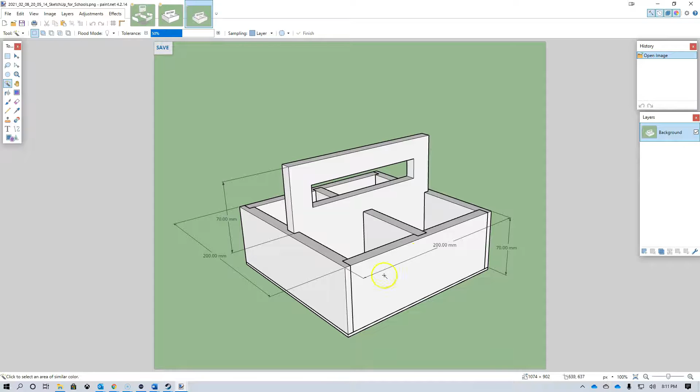So we'll be designing 5 unique pieces, but there's obviously 7 pieces that actually make up the box itself when it's made. Some of the design options you'll have, apart from colours and so forth, is possibly changing the handle shape and even design and materials.

You might decide not to have a simple crossover. So if we go back to the first picture, you might decide to cut this off, for example, and have some other form of handle. You might decide to rearrange the way these cross instead of being exactly in the middle. You might decide to put plates or other things on here that then hold things like cutlery in position, and a whole lot of other things.

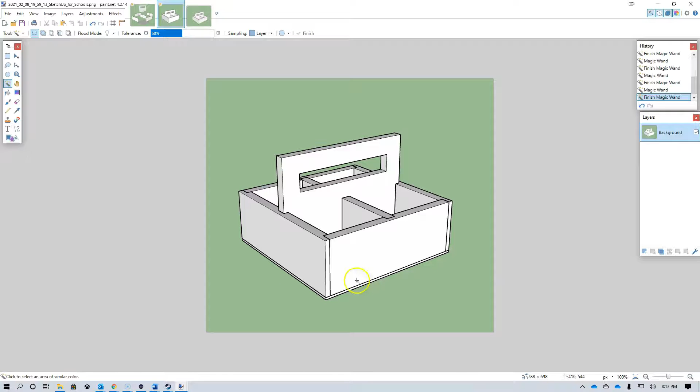But this is the base design that we're all going to work with from the beginning, and then you'll be able to customize from there. So let's have a look at how we actually go about doing this.

So we're going to come in to SketchUp. The first thing when you start a new SketchUp is to make sure that we're working in millimeters. I'm coming over here to the model info, also the inspector in general, making sure I am working in millimeters. Quite often when you first begin, you might be in inches or even feet, so make sure you're working in millimeters.

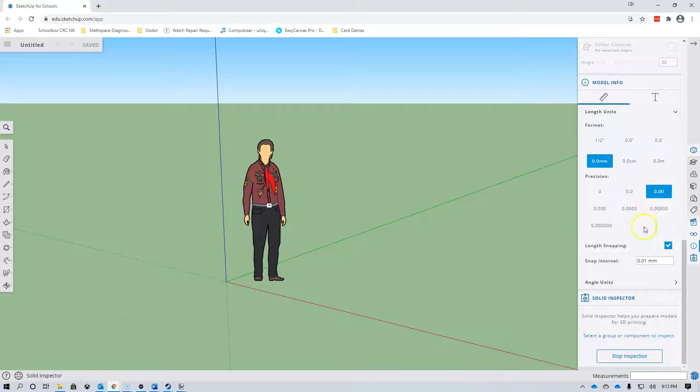Precision and so forth don't matter, you can just go to defaults, but definitely make sure we work in millimeters. And of course we can close that down. I tend to also get rid of the little person - we don't need them, we're not going to be designing something of that size.

So the way I would normally go about designing this - there's a few different ways. You could start with a full top-down view and then pull everything into the size it should be, but I like to start with designing the pieces one by one. So I'm going to start with probably the most complex piece, which is the one with the rebate and housing joints on them, and I'm going to start by drawing myself a rectangle.

I don't really care about size at the moment, because as soon as I let go of that mouse, I'm going to type the correct dimensions so they come in this box down here on the bottom right. We know the box should be 200 millimeters long, and it's also 12 millimeters wide. We know which order to do this, because we've drawn deliberately a very clear rectangle with one long side and one shorter side. If we look at these measurements, the longer side is the first number, and the shorter side is the second. So if I type in 200, comma, and 12, that's going to create a rectangle that's 200 millimeters long in one direction and 12 millimeters in the other.

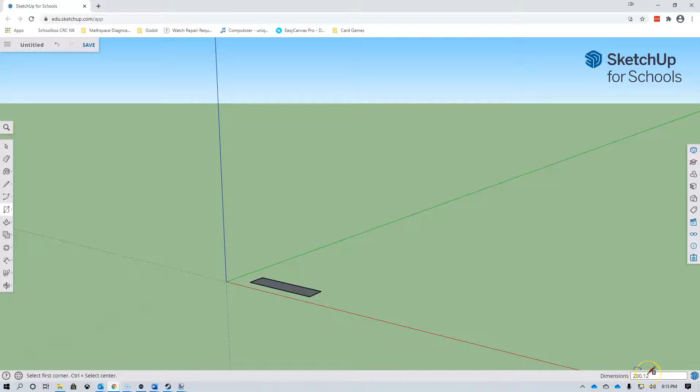Press enter, and that's what's happened - and it is really, really small. Remember, this is not as obvious with perspective because we're zoomed right out at the moment.

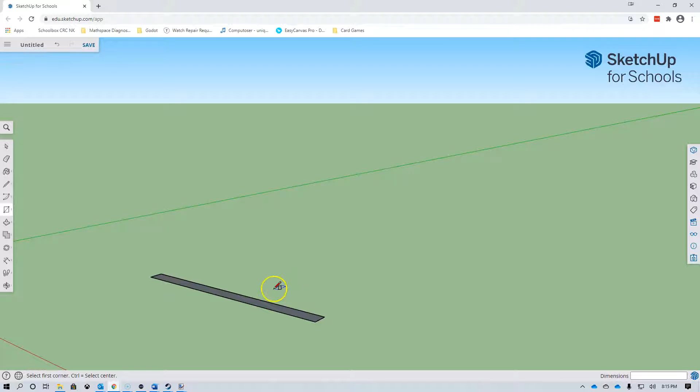I'm going to use my mouse or the controls to zoom in, but this is actually drawn the correct size. The other thing I like to do is orbit quite a bit. If you've got a mouse with a wheel, you can usually press the center wheel down to orbit. Mine doesn't seem to be working, so I'm pressing O to change to the orbit tool so I can orbit around. That's going to be a really useful tool - scroll in and out with the scroll wheel, and usually press and hold the scroll wheel to orbit, but I'm choosing to use the keyboard at the moment.

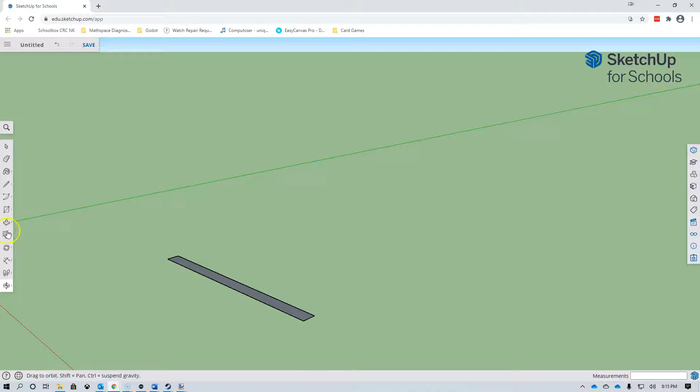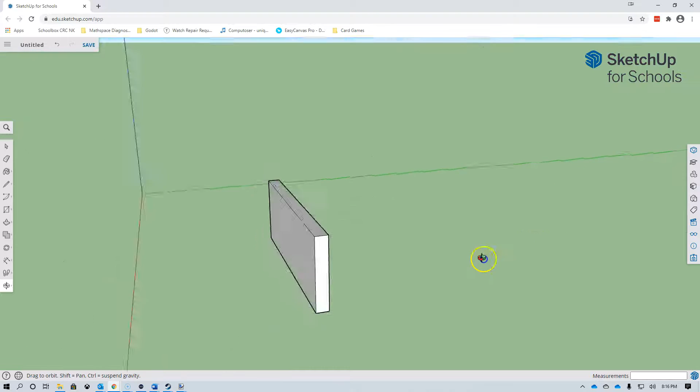So we've got the right size for a piece of wood, but now we'll use the push-pull tool, choose that and pull it up. I don't care about the actual dimension because I'm going to type it in, seeing that the 70 came up down here, press enter so it goes to the right size. So I now have a piece of wood that is exactly the same as what I would cut - 200 millimeters long, 70 millimeters high, and 12 millimeters in thickness.

Now I'm going to orbit round to the other side. This is going to be outside of my box. I'm going to orbit round to this side so I can see, and I'm now going to cut in the rebate joints.

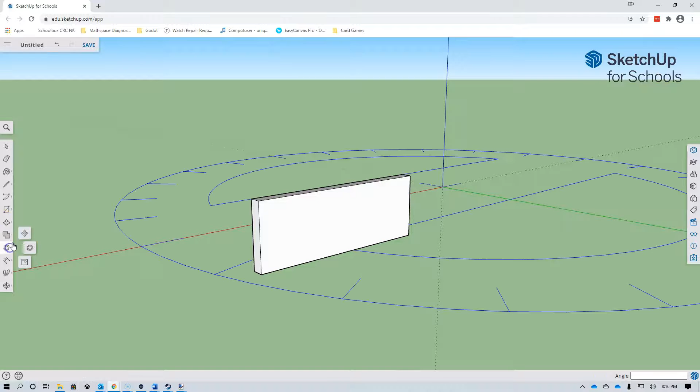Now there's a number of ways you could measure these - I'll do two different ways, one on each end. One way is to simply take the tape measure, and choose the tape measure. From the edge, I'm going to measure in, making sure it's on the red axis, so it's following that along. I'm going to measure 12 millimeters, that's how deep our rebate should be. I'm then going to draw a line that connects from that intersection to that intersection there.

That gives me a new shape that I can choose, and then I'm going to take my push-pull tool and push that in. Again, I don't care about the depth itself, because I'm going to press 6 - you see that down the bottom right - and press enter. So that's now taken out half of that piece of wood, just like a rebate joint should be. I will use my eraser to rub out this construction line to get rid of it. So that's a perfectly valid way of creating that rebate joint.

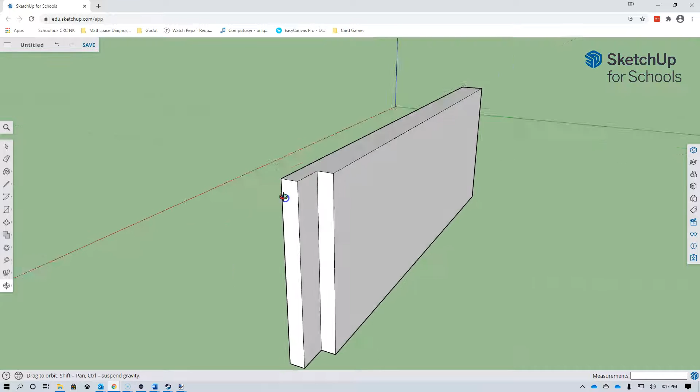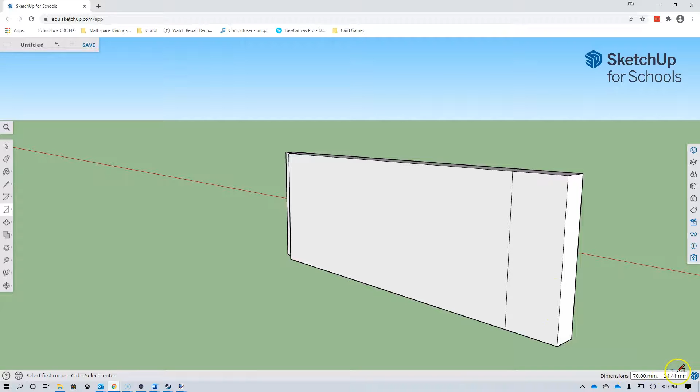Let's have a look at the other end. I'll just zoom out and rotate around a bit. So one other way I might like to do this, and this is actually maybe a bit quicker, is to just draw another rectangle. If I start in the corner and go down to the bottom, now I know how tall it should be, which is 70, and I also know this width, which at the moment is approximately 24.41. But if I put 70, 12, I've got another rectangle drawn on top of this main one that's the right size, and again I just use my push-pull tool, putting in 6 as the depth, and I've also got the same outcome. So as we can see, there are often multiple ways to shape or design.

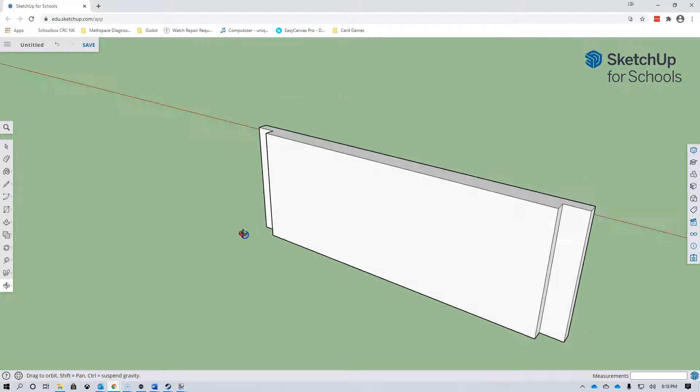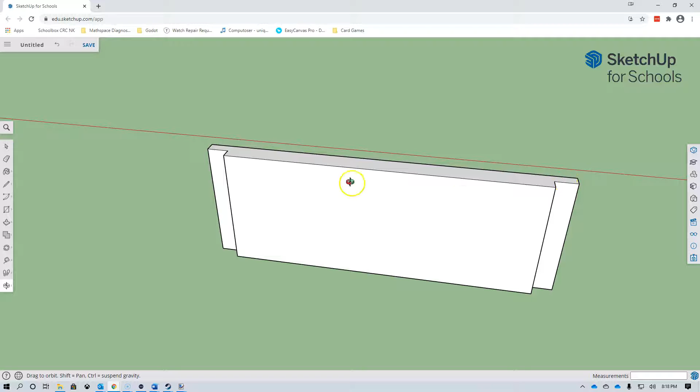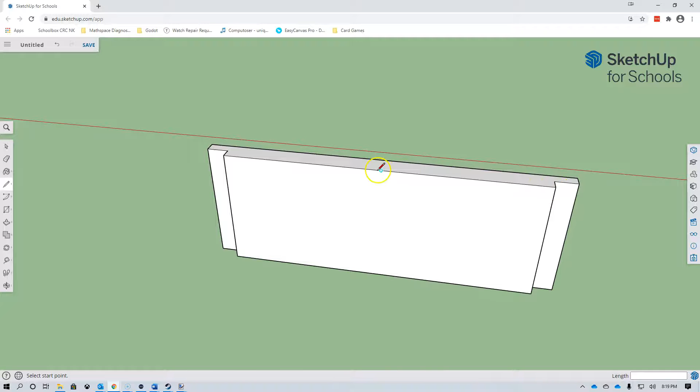So again, there's a few ways you can go about this. The way I'm going to do here is use my pencil tool for the moment, and just find the center. I don't actually have to measure, because as I go along an edge like this, SketchUp will show me the midpoint, the middle of this whole length. So there's my midpoint - I can very easily draw a straight line. It shows up as blue because I'm going down the blue axis to the midpoint at the bottom. So this is a line exactly in the middle.

And then what I'm going to use is my tape measure to draw from that line across, again making sure it stays on the red, and I don't care how big I make it because I'm going to type 6 in. The reason I'm doing 6 is I want a housing joint that's exactly 12 in total, with 6 on each side of the line.

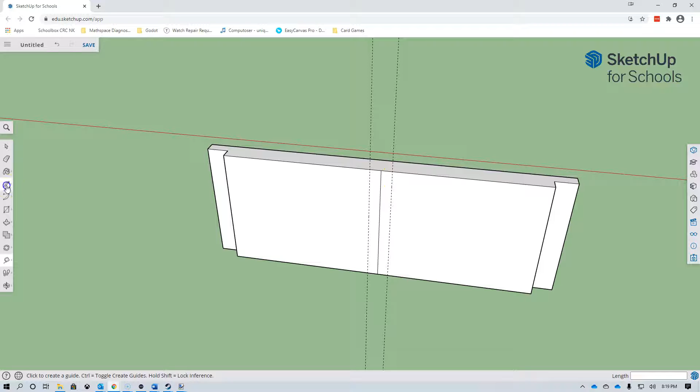And then I could either use the pencil to draw down on both of these, or again I might just use my rectangle tool to go from that corner to that corner to create this space that I can then cut out a bit like I did with my rebates.

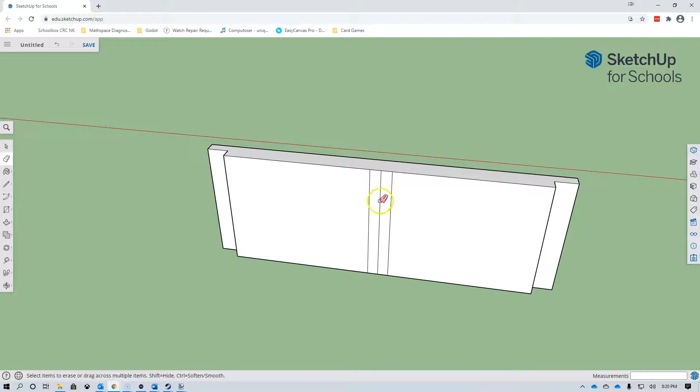But before I do that, I'm just going to do a bit of tidy up. I'm going to get rid of these construction lines that I don't need, and I'm also very carefully going to get rid of the center line. If I didn't get rid of the center line, what you'll see is these are two separate shapes.

When I push and pull them, you see I'm doing them separately. I'm just doing Control Z to undo. So to make it a bit easier for myself before I go ahead, I'm getting rid of that center line so that this is now one shape. So push that in a bit, it doesn't matter how much because I'm going to press 6 to make it go exactly halfway.

So now what I have here is a piece that has two rebate joints and a housing joint exactly in the middle.

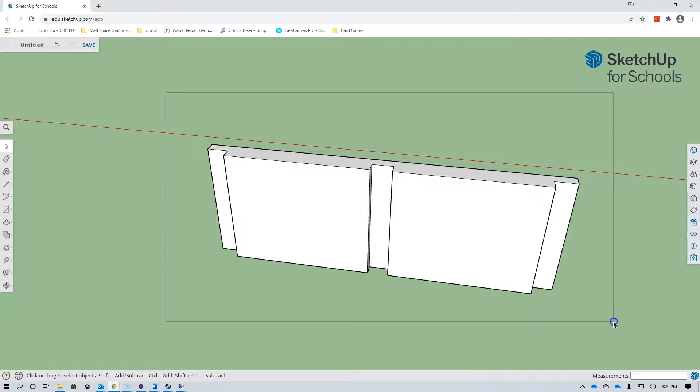Before I go any further, I'm going to highlight this whole section, just selecting and dragging over the whole lot, making sure that all the lines and faces are selected. I'm going to right click and turn this into a component.

Turning it into a component means that you can do things like copy it and move it around. It means that you can keep it from getting accidentally changed by something else. So I'm going to make this component.

And I'm going to give it an appropriate name. So I'm going to call this side with rebates. Just type that in and press OK.

So now you can see that's a component. If I click off it and click on it again, you see it's a whole piece.

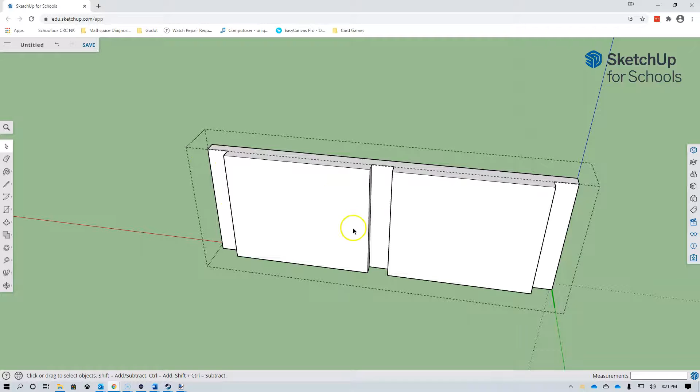Anytime there's a component, you have to double click on the component to be able to edit it. If you're not double clicked and seeing this dotted line around it, then you're not editing the actual component, you're just editing on top of it. And if you want to get out, you just click or double click somewhere else. So that's a component now.

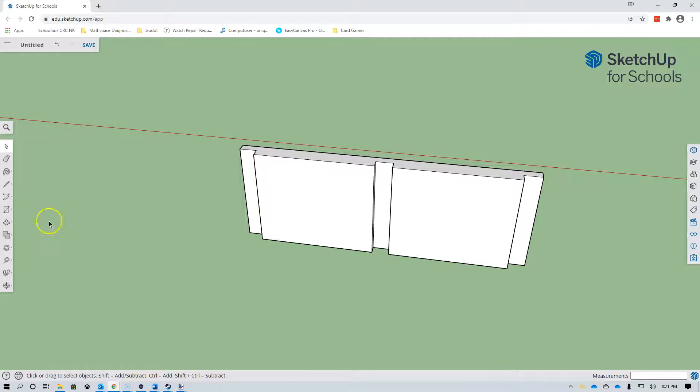We could just copy this, turn it around and make the opposite side, but let's do the other piece now. So the other piece I want is going to come out the side. The way I'm going to go about drawing this is I'm going to build it off of the piece I've already got. So I'm going to use my orbit tool just to rotate around a bit so I can see this side.

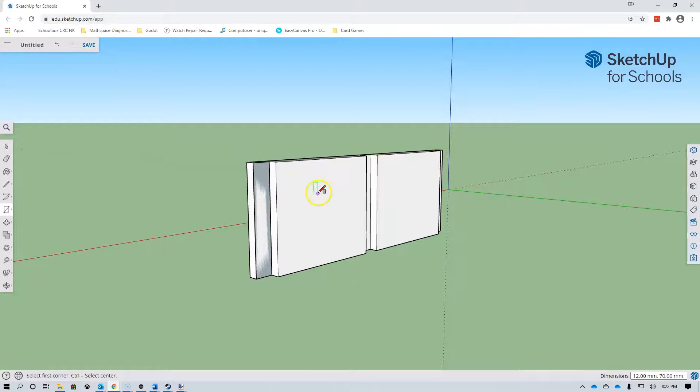And I'm going to draw again a rectangle, taking advantage of the fact that I already have the size and shape that I need here. So I'm going to draw a rectangle, and remember I haven't double clicked on the component, so I've actually drawn a rectangle on top of this at the moment. It's a whole separate shape. And I can take my push and pull tool now and pull out the other piece.

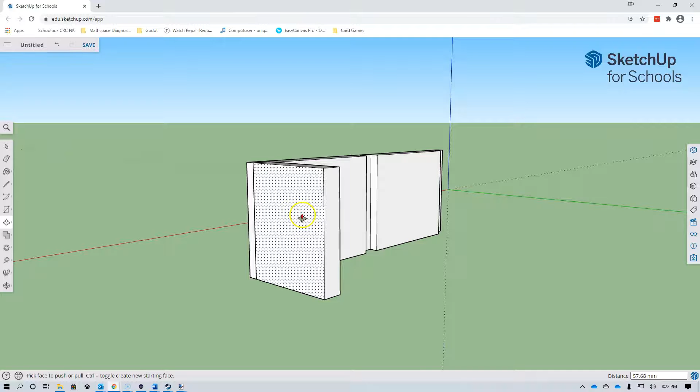Now we want a box that's 200 wide on each side, but we have to take into account the rebates, which this rebate here is going to be 6, and on the other side there will be 6. So the whole side piece that we're making now has to be 200 minus 6 and minus 6, which of course is 188. And I'm just going to undo this because what I want to do is pull that out.

Again, it doesn't matter how much. I'm going to type 188, so it comes in the bottom right hand little box, and press enter. So now I've got the piece that I want.

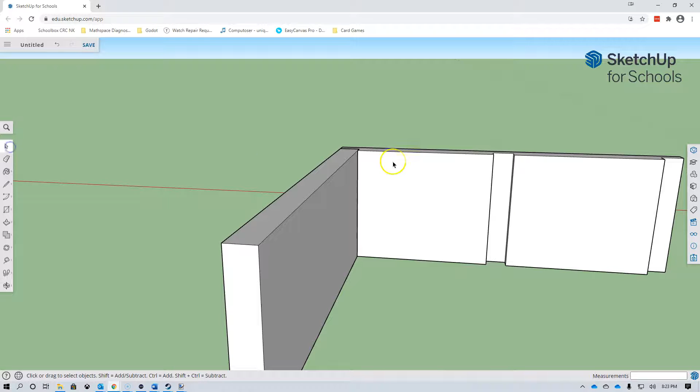And what I'll do now is I'll orbit round. I'll select this component and right click and choose to hide it because I just want to work with this piece at the moment. So you can see it's hidden away, and at any stage when I want to get that back, I can simply come over to the little glasses that we have over here and unhide it.

Right, so I could either unhide all the pieces, the last piece, etc. that I just did. So if I said all now, you see that piece comes back. So I'm just going to hide it again and I'll just pop away this display.

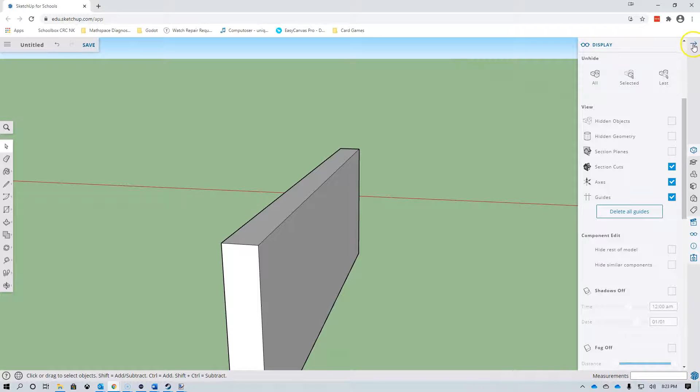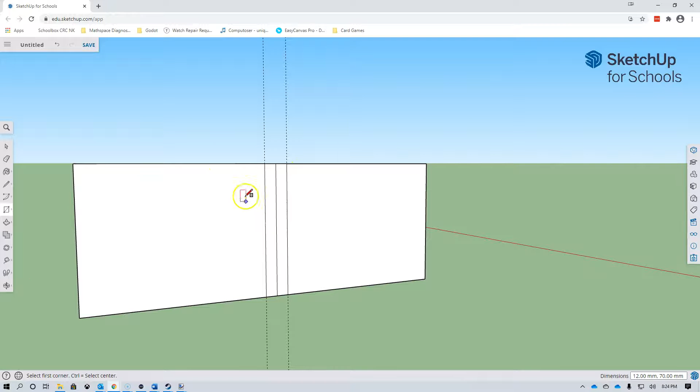So orbiting around to here, and just like we did before, we want to put a housing joint directly in the center. So we use exactly the same methodology. We're going to start by finding the center point that's already built in. There it is, and draw a line straight down. We're going to take our tape measure and draw 6 millimeters on each side. There we go, and then we will use our rectangle tool to go from that marking point to that marking point. We're always taking advantage of the locking points that get created when we draw things.

And like before, we'll do a bit of cleanup first. Clean up that center line that we don't need. Be careful you don't accidentally delete a face or some line that you do need, like that. That would be pretty bad. So if you do, just undo it. And again, I'm going to take the push-pull tool, push it in a bit, and then press 6 and enter to get the exact measurement I want.

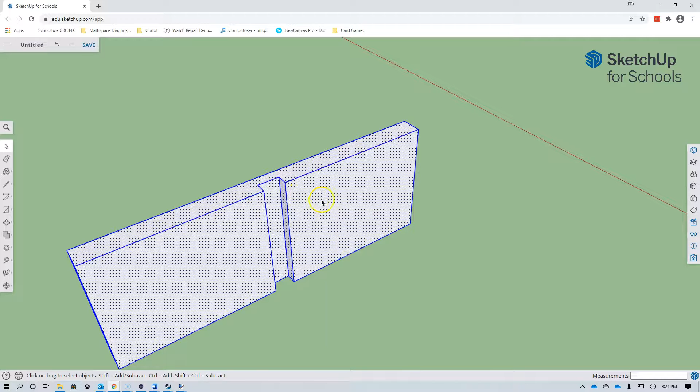So if I orbit around this one now, we'll see that we have a piece with a housing joint in it as well. And just like before, I'm going to select everything here, being careful that it all gets selected. You can see because I missed some in this corner, it didn't all select. So just when you are selecting things, be careful you get absolutely everything that you want. And I'm going to turn this into a component as well, and I'll call this, what should I call it? Housing side. That'll do. And press OK. So I've got 2 components now.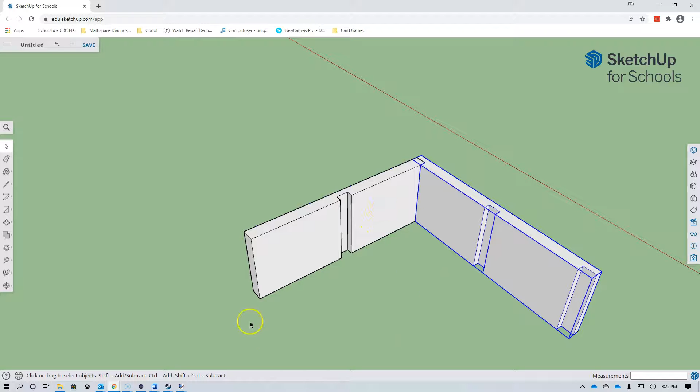And what we're going to see now, let's unhide. So we'll unhide all. So we can see we've got 2 pieces that are making a nice perfect corner the way we want. So to do the opposite 2 sides, we're not going to redraw it all. We're going to take advantage of these 2 components. We're going to create a copy of this one and spin it around to come across here, and a copy of this one spun around to come across here. So let's do that first. So select this one, simple Control V, copy and paste, and just drag across. So we can see it's there, but it's facing the wrong way again.

So what we want is to come over here to this cross tool, which we're going to change to be the rotation tool. We're very carefully going to come over and put our protractor on. Now I like to work from a corner, and you have to make sure that your protractor's facing the way you expect. So I'm going to rotate around this axis, not, for example, around the red axis, which would twist it. So I'm very, very carefully coming here, click. I usually like to go along the edge a bit and click again, and that gives you that rotation point. So where we first click is the rotation point, and the second click was sort of where we're rotating at.

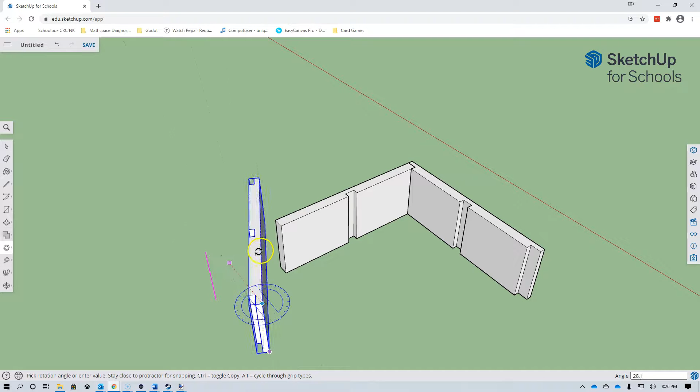And again, you can do it manually, or look down the bottom right, you can see that as I rotate, there's the exact amount. We know we're going from this way, we want to spin it exactly around, so that's 180 degrees. So in reality, I can just type 180 and press enter, and I've got a perfect rotation. Alright, now be careful you don't accidentally rotate again without meaning to.

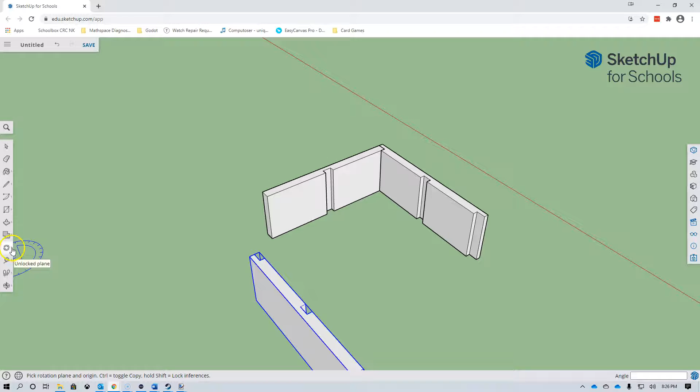So the next thing I'm going to do is actually move this piece across. So again, I'm going to come over to the same place and go back to using this 4-arrow move tool. I'm just going to zoom in a bit, because what I want to do is take advantage again of the locking points. I want to lock this corner to this corner here. So if you think about this joint, this part of the rebate would be joined to this corner here.

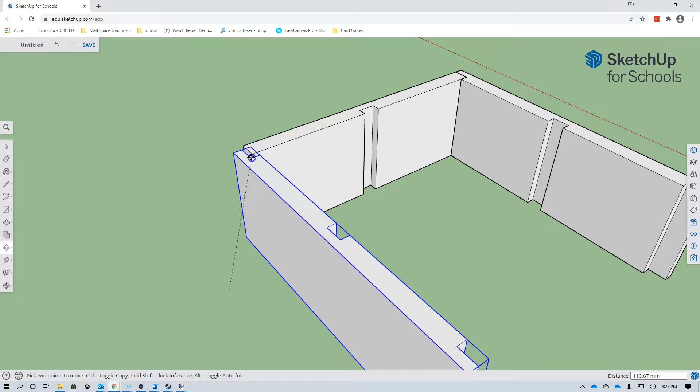So if I click and hold on that corner and I bring it along, I should be able to bring my cursor to that, and you can see how it locks in place. Right? That's really useful. It's locking in place for us. So those two corners have met, and that's exactly what we want. So we've now got two components joined with this side. And we're going to do the same here. So remember, we select it, just simply going to copy and paste it and bring it across just out of the way, roughly where we want.

We're going to come over here and get our rotation tool, making sure that we maybe start from a corner and move along the line a bit. Once we know it's rotating the way we want, we can just type in the exact amount we want, so 180 again in this case.

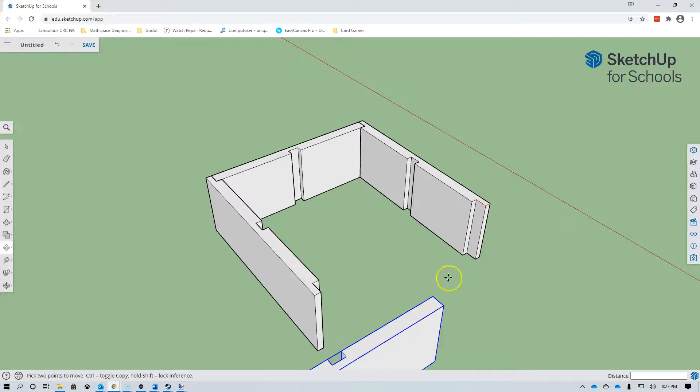Then I'm going to come over here and change the tool back to the movement tool. I'm going to think about what's going to go where. So again, this corner is going to lock in place with that one. So I'm going to grab and hold that corner and try and bring it roughly in place until it locks in. You might need to really zoom in to see it, right? So just to make sure it really locks in place. And there we go. We have our 4 sides done.

As always, you should save regularly. I haven't actually named this yet, so let's pretend we've gone ahead and named this, and of course save regularly so you don't lose any work.

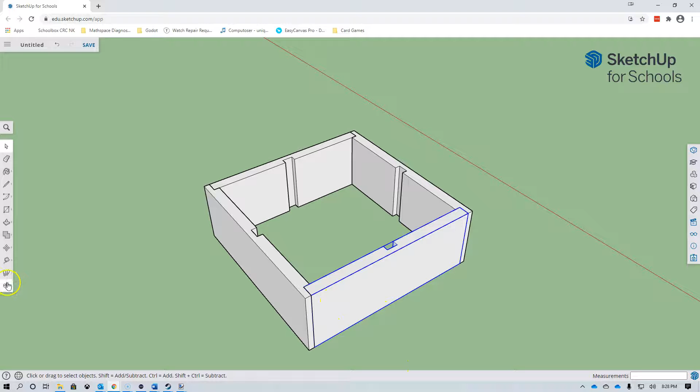Now the next thing I'm going to do is actually put the base on this. So what I'm going to do here is I'm going to orbit round to underneath. I'm just physically rotating around so I can see the bottom. And again, I'm going to take advantage of the corners that we can snap into. So I'm going to get my rectangle tool, and I'm simply going to go from this far corner here across to this far corner there. And I'm literally drawing a big box that fits over that.

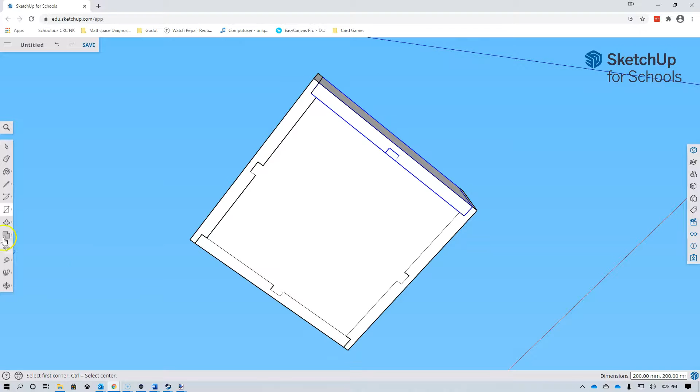And then I'm going to use my push-pull tool, grabbing that and pulling it down, and then just typing 3 for 3 millimeters, pressing enter. And again, if I orbit round to a better view, you'll see I've done that. So maybe if I undo that, I'll show you the push-pull again. So here we go, pushing and pulling that down, but I want it to be 3 millimeters, press enter, and there we go. Now that is not a component yet, so that's another thing we need to do.

So let's orbit to see a bit better. Let's now use our selection tool, select that one and right-click hide. Let's hide that one, let's hide that one, and let's hide that one. So all we have now is the base.

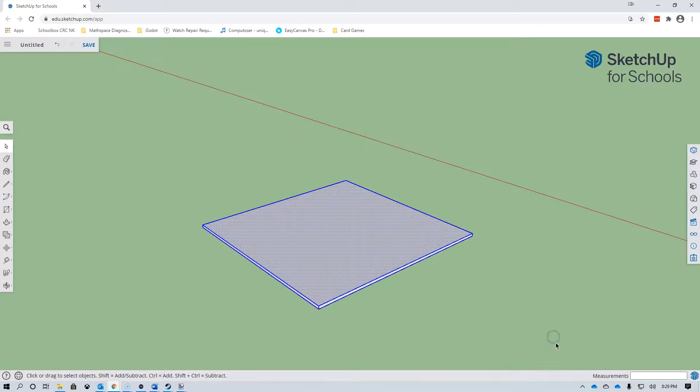And the reason I do that is because I can just highlight like this and turn this into a component as well. If you've got any other components there or pieces and you highlight them, they become part of this component. So you can actually join components into other components to make complex pieces. But I just want the base, so it's easy to hide everything else to make selection easier. So I'm going to make that a component. I'll just call that base.

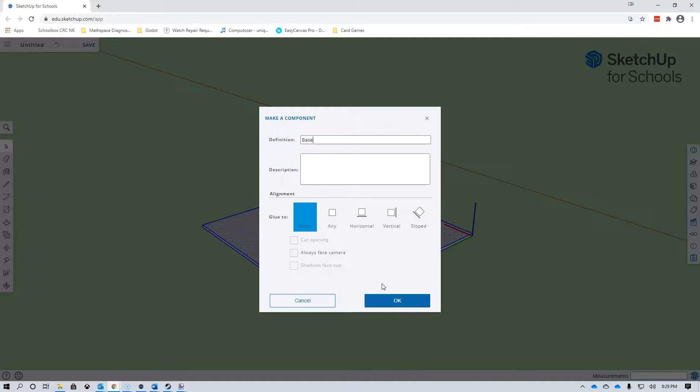Alright, so now I've got lots of components there. And again, if I want to bring them back, I'll just unhide all, and there we go. So all the different components so far, and the base now as well.

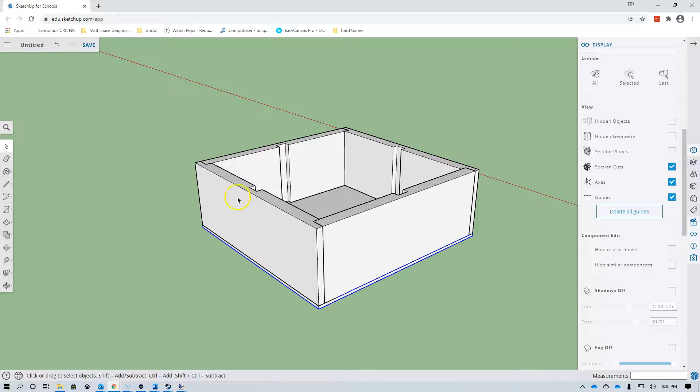So we're getting close. We need to do our one crossover piece with a cross piece in it, and then we need to do the second one with the bigger handle piece. So to keep it the same as the original drawing, we'll do our first one straight across here, and this one with the handle will be drawn as that piece going across this way. So we're going to do it very much the same as we started before.

So let's hide some pieces we don't need. So we're going to hide that piece, we're going to hide that piece. Let's hide this one as well. And then let's hide this base. We don't need it. We just want one piece to start from. So I'm going to zoom in quite a bit to see this. Alright. And again, I'm going to take advantage of the corners.

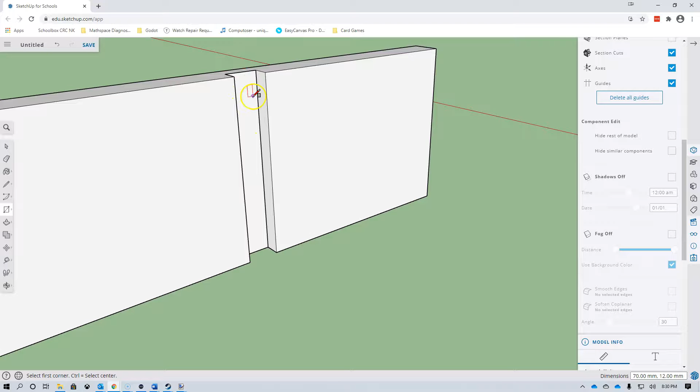So I'm going to draw my box again from this corner here up to this corner, which will create a rectangle on that surface. Remember, it's not part of the component, it's a separate piece right now. And again, if I think about it, it's just like when I drew this piece, I've got to take into account that part of the housing joint which has 6 millimeters, and on the opposite side will be 6. So just like this piece, I want to end up with a piece that's 188 across.

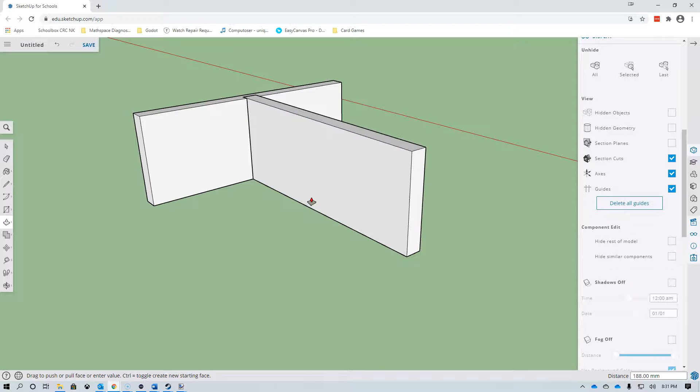So I'm going to take my push-pull tool, drag out any amount, and type 188 in. Alright, so now I've got a piece again. I'm going to now hide this component because I don't want to accidentally do anything to it. So I can really just focus on this piece now.

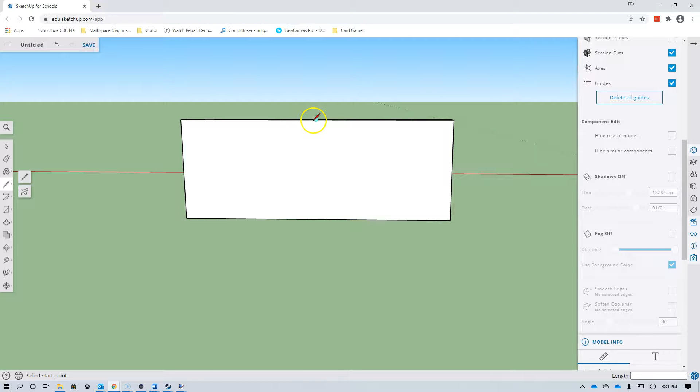So what I want is to cut out for the crossover piece the half section in the middle. So a little bit like I did with the housing joint, I'm going to start firstly by finding the middle. And again, taking advantage of the built-in midpoint, just draw a line down the middle there. And just like before, I'm also going to draw with my tape measure, which of course I've lost. Where'd it go? I always forget where it goes. Oh, it's right there looking at me.

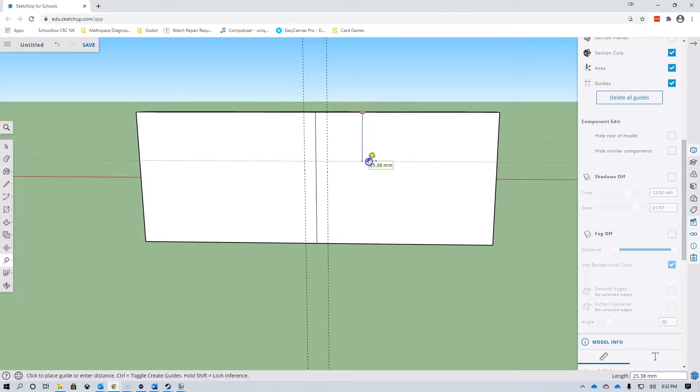So from this center line I just drew, I'm going to go 6 millimeters across, because I've still got to take into account a 12 millimeter piece in total. But I want to go halfway down. So again, I'm just going to take my tape measure, and I could guess or work it out, but I know this whole piece is 70 millimeters tall. So go down a certain amount, and instead of typing 70, I'm going to type 35. So I've got a measurement line that's exactly halfway down.

Just like before though, I'm going to take my rectangle tool and take advantage of all these locking points we've made and create a rectangle there that locks. Again, like before, use my eraser to clear out extra things we don't need, these construction lines, this center line, and that part there, because we just want this piece. And again, I'm going to push and pull this out. Now I might just orbit a bit more so we can see it. That's a better view. And if I push and pull that piece out so it's level with the edge, you can see I've now cut that piece out.

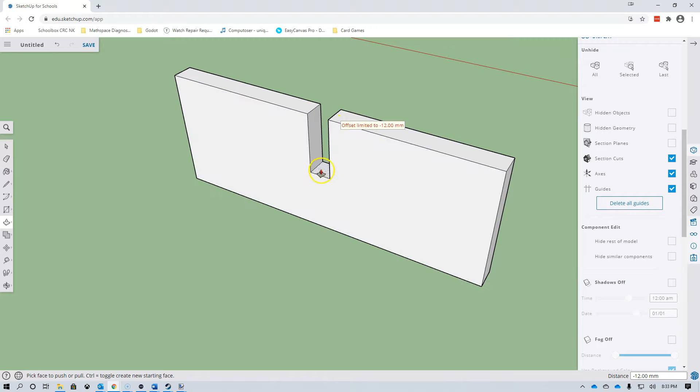Okay. Before I do anything else, I am going to turn this into a component as well. So highlight, select everything, right click to make a component, and I will call this not housing, crossover. Alright, so again, if I show everything, you can see that piece in relation to the rest of it. It's perfectly in place because I used all the right measurements and I started off from that gap that's already there. So the last thing I need to do is the piece across here, which is also going to have the opposite part of this housing in it.

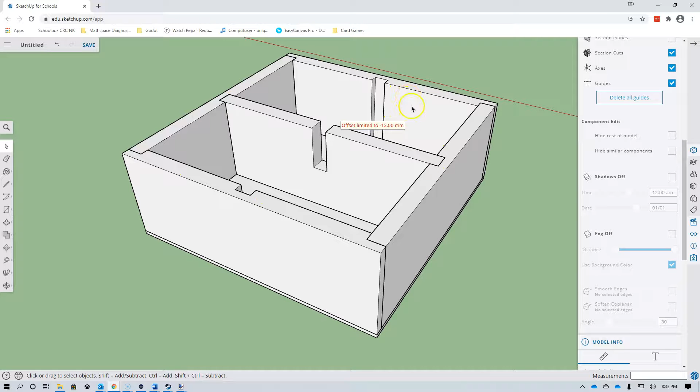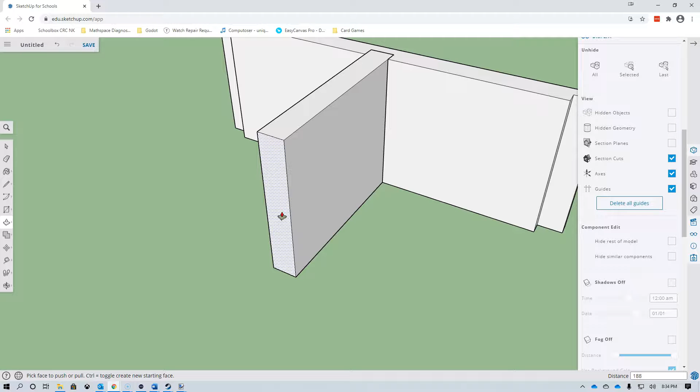So coming up from the bottom, it's going to be again 188 across to take into account this, but instead of being 70 tall, it's going to be 140 tall. So 70 plus another 70 for the handle. So just like before, let's start with something we have, maybe this piece over here. So let's hide everything else because we don't want to accidentally edit anything. We're going to start just like before, taking what we have, which is locking point from one to the other. We're going to pull that out to be 188, remember, because that takes into account the 6 on each side for the housing joint. And then we're also going to hide away this component now that we don't want.

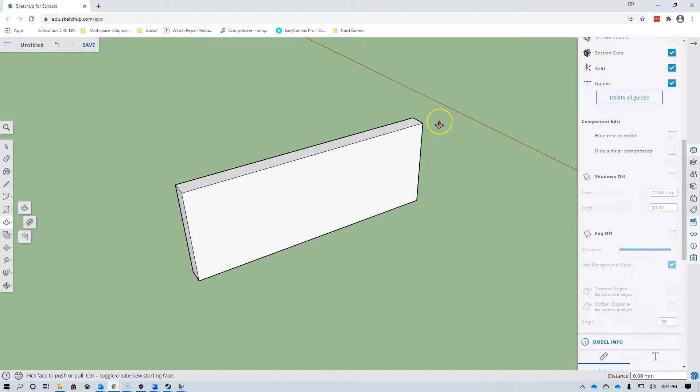Okay, so orbiting around so we can see it a bit better. Now there's two ways we can go about this. We could fix the height now, or we could fix it later. I'm going to fix it now actually. So we've got a piece that's the right size and it's to the top. If I bring everything back for a second, let's unhide all. You can see how it's just to that height. Oh, something didn't come back. Why is that? That's interesting. I seem to have lost a piece. Well, if that happens, it's not the end of the world. I'll just triple check I haven't hidden it.

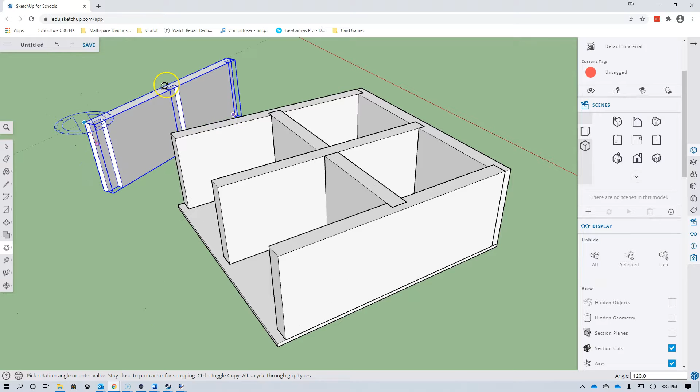Now, I know I could technically just edit this out of the video, but let's use it as a point of learning. So we seem to have lost a piece. Not a problem. We'll just copy that piece again, and we'll quickly re-rotate it. So we would need to get our rotation tool. We need to choose from a corner across, make sure it's rotating the way we want, and put in 180, and then we need to bring it back in place. So changing that back to the move tool, we'll take that corner there and lock it into that there.

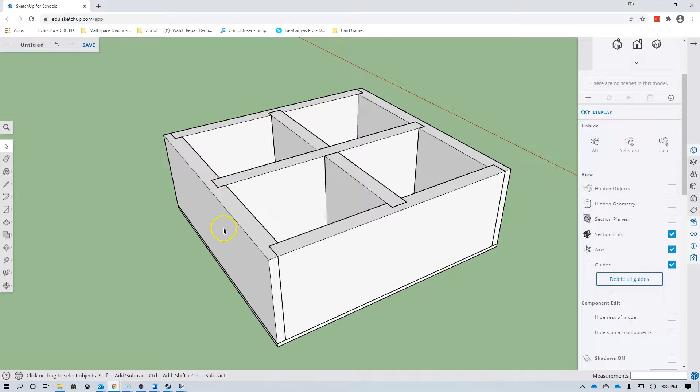So I don't know what happened, but that's the sort of thing that can happen. So again, it's a good reason to use components, because if you do make a mistake or something goes wrong, you can often just replace it with a copy of a previous component. But anyway, what I was talking about is how this piece across here is not tall enough for the handle. So now that we see that, we can just take that piece and pull it up by another 70.

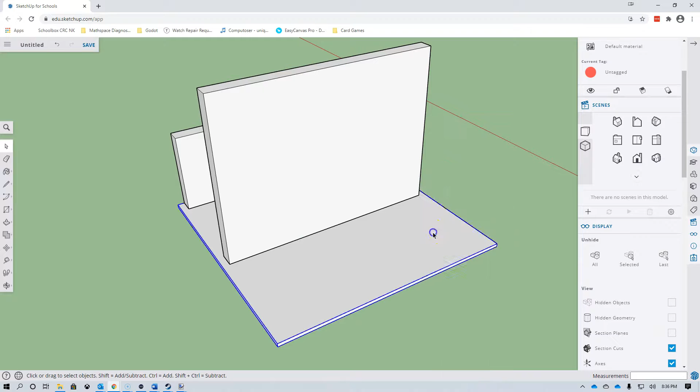So we're just typing 70 to get the full height. So you can now see how that works. Let's hide off all the... I might have pressed erase before instead of hide. I think that's probably what I did. And if you look back through the video, you might see me actually doing that. Hide everything off, though, that we don't want, so we can just, again, work on this piece.

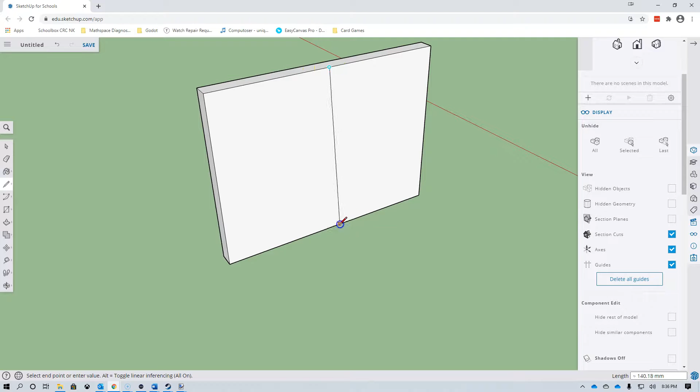Now, what I need here is a cutout that's around the middle again, but only goes up 35 to allow for the crossover joint. So it's exactly like we've been doing this whole time, where I'm going to start by taking advantage of the middle point with my pencil and drawing a straight line down to the opposite middle point. There it is. I'm again going to measure 6 millimeters from that line across on both of them. So 6 millimeters, making sure it's carefully on the axes.

Then I'm going to use my tape measure to go up again 35, just like before. And again, I'm going to draw a rectangle, taking advantage of these locking points that were created. Take my eraser to clean up construction lines and lines that I don't need. And just like before, use my push-pull tool. In fact, I'll just orbit again to a better angle, maybe like that. And use the push-pull tool to push that out.

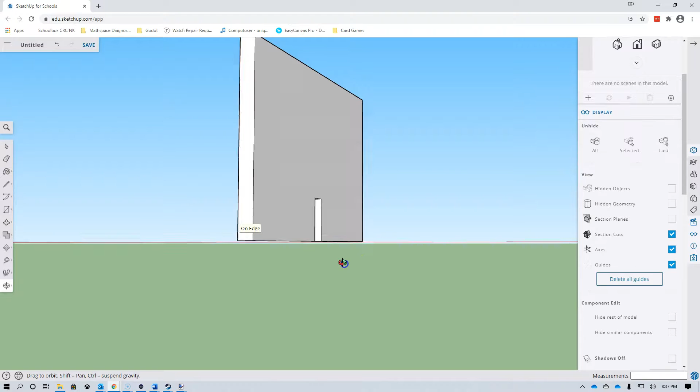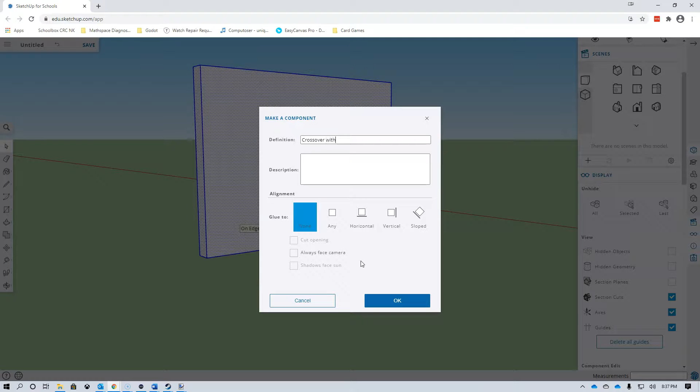And you can lock it to an edge. So if I lock it to that edge, it's the same as saying the back. And if I orbit round, you'll see that's nice and empty. Okay, so that will now lock in place with the other piece. And again, I'm going to select everything here and make this one a component, and I'll call this crossover with handle.

Okay, and technically now if I unhide all the pieces and do a little bit of better orbiting, I do in fact have all my pieces. So I've got the two sides with the housing joints on it, I've got the two sides with housing and rebates, I've got a piece that does the crossover, and I've got the other bigger piece that the handle needs to go in. So the last thing I haven't designed is my handle.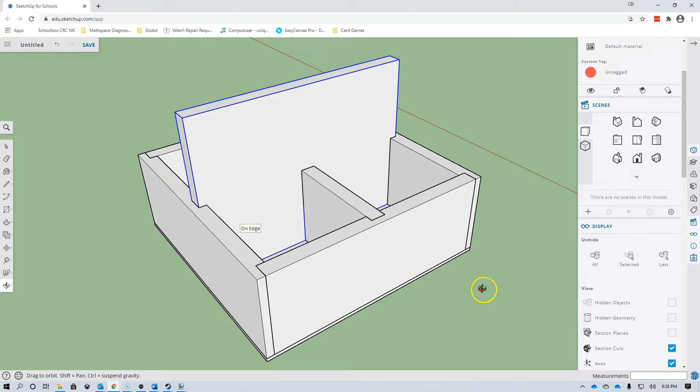So again, what I'm going to do is hide off all these things, so just focusing on that piece. So just lots of hiding, lots of showing to make it easy to see. I'm just going to focus on this piece again. So what I might do here is, first of all, I've got to double click. Now don't forget, this is a component, so if I didn't do that, let's say I draw a rectangle just randomly there.

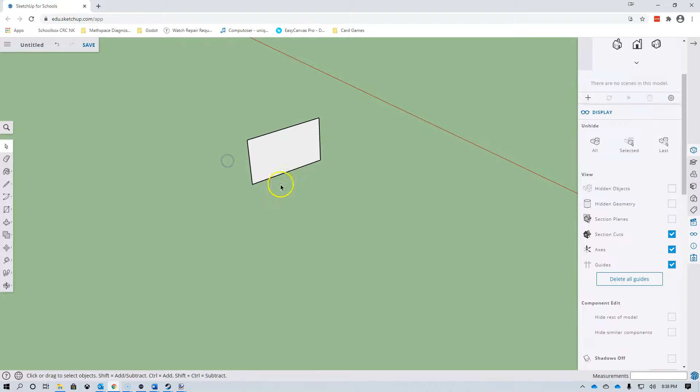I think that's part of that model, but if I hide this component for a second, you'll see that that rectangle is actually there. It was a separate rectangle, so that's not what I want. I have to double click to get this dotted line to show that I'm editing this component. So now if I draw a rectangle on there, it would be part of this particular component.

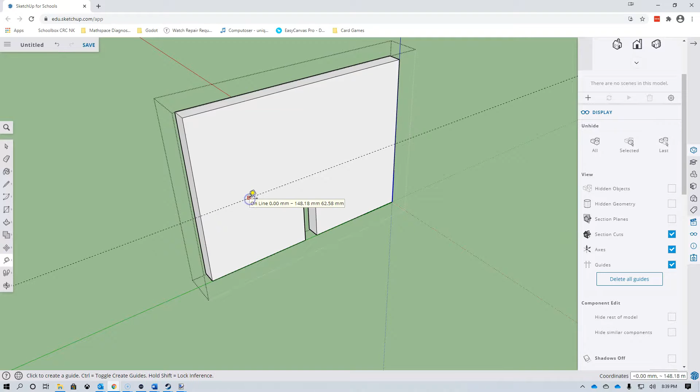So what I'm going to do first, I'm going to start from the bottom. I'm going to draw a 70 millimeter line up. The reason I've done that is this is the top of the rest of the box. So I don't want to do anything in this space because that would be too low. Then what I'm going to do is decide how I want my handle to look. So this is really where you get a bit of customization, because you might want to have a circular handle, you might want to do little holes, you might want to do a different shape.

Just remember that whatever you do, you have to leave enough material for it to be strong enough. If you're going to lift this up, it has to have some strength. So, if you are going to just leave it as the wood, I would strongly encourage you to maybe leave at least 20 millimeters, so 2 centimeters on either side. So I'm using, again, just my tape measure, drawing down and telling it to be exactly 20, which is 20 millimeters, across this way 20, and across this way 20.

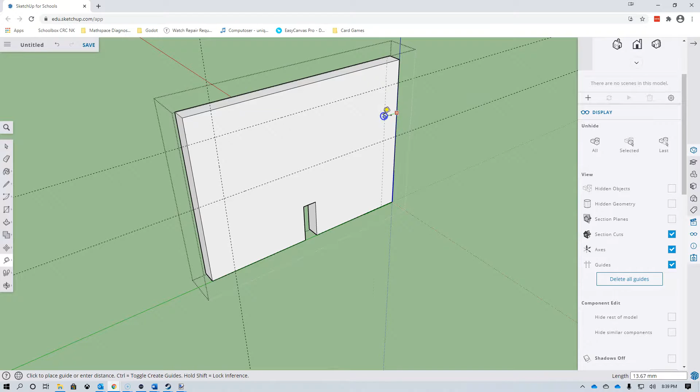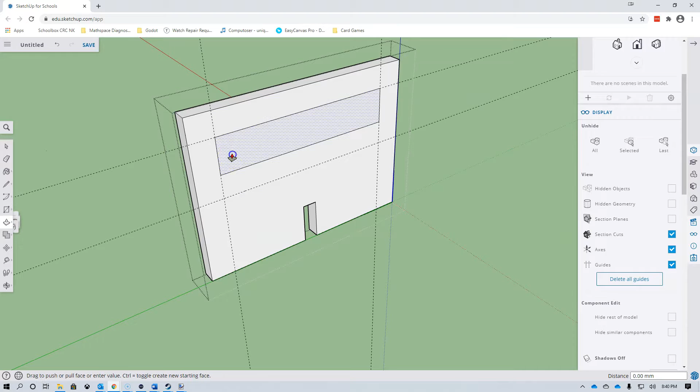Essentially what I've done is I've created a space here, which is the place that I can work in. Anything else needs to stay to give us strength. So at the very most basic level, what I might do is now draw a rectangle in here that I'm happy with. All right, I might push and pull that out so that it is gone. There you go. And I've created a workable handle. Okay, rubbing out the construction lines that I don't need, being careful not to rub out things I do need, and that would be a completely functional handle.

But I might want to make that a little bit better. So one of the things I might want to do is just round off these edges a bit, using the corner tool. I tend to like this tool. Work out where I want it to go from so I get a nice angle, making sure it's on the face, not off it. So there you go, like that maybe. And again, I can push and pull that angle piece out to give it a nice curve.

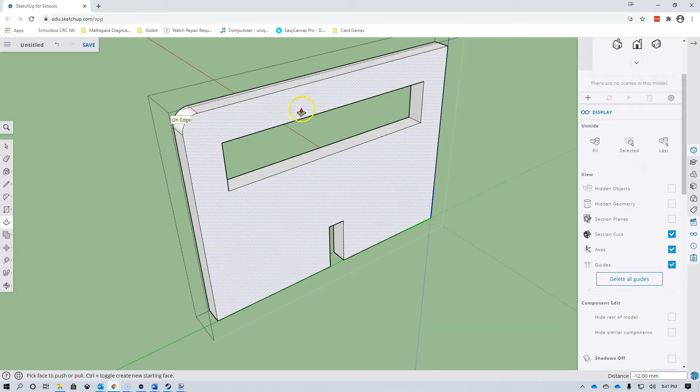Do the same on the other side, so I'm going to rotate round and use that angle tool again. I probably should have done some measurement to make sure they're in the right places, but I'm just freehanding it for this demo right now. And again, push and pull that out to round it out.

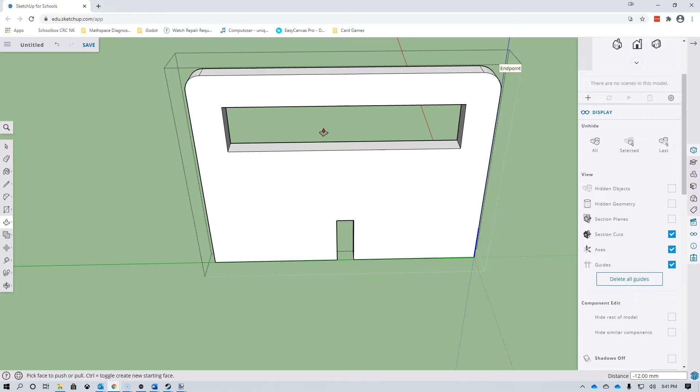I might want to do the same on the inside of this, so instead of having just this sharp corner, maybe I wanted these to be rounded. So instead of a rectangle I might have done an oval, or before I pushed and pulled it out I might have put those curves in and then pushed and pulled it to make it a bit more of a rectangular shape with rounded edges. And I can basically have some fun designing a nice handle. But when I'm done, I can just double click outside of that and that component is now all done.

And if I now unhide all the pieces, there we go, we can see all the different pieces that make up our box.

The one last thing I'll quickly remind you of, if you haven't done it for a while, is putting dimensions in. So if you come in to where the tape measure is and you pop out the little menu, you'll see this one here, which is dimensions. And if you basically click from one point to another point and then pull your mouse out, you'll get a set of dimension lines, which is really useful to make sure you know.

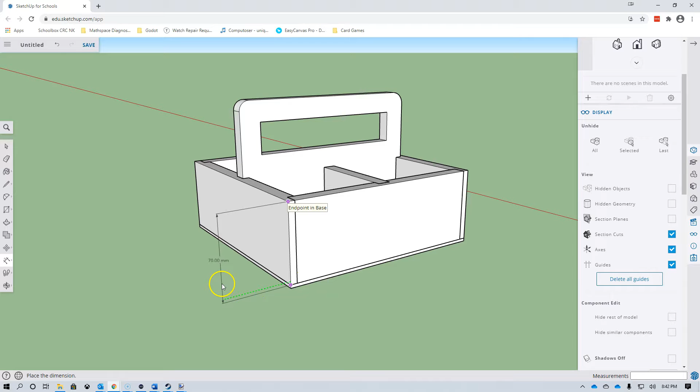So let's say, like I did here, I kind of freehanded this rectangle in the end, but maybe I want to know what size that actually came out as. So I can go from here to here, and there you go, I see that I need to cut 148. But how far was it from the end? Well, let's see, if I go from there across to this edge, I can see that it is 70.

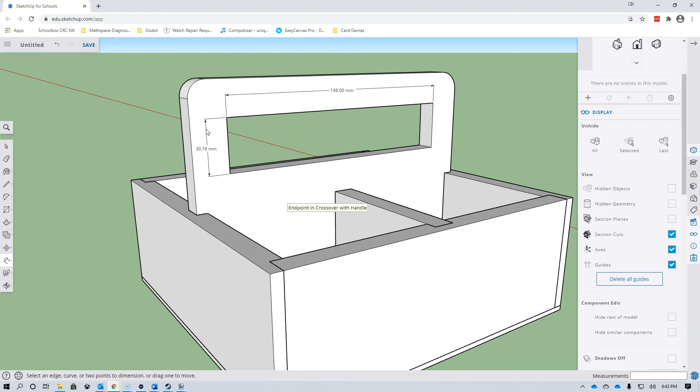Alright, how tall was it? Well, from there to there, bring it out, it's actually 30.18. So when I make this, I might make that 30, which I should probably design that properly here. But if not, if I'm happy to try and make it exactly to that size, I now know that I need to cut it at 30.18 millimeters. And of course, you can do the dimensions wherever you want.

And that is the process for creating your barbecue box as a starting point. Generally speaking, in my class, I then expect you to go off and modify the design. Certainly do things like colors, think about materials, think about other things you could do to this, but you should be able to design completely and to the correct sizing what you want to do, and then from there we can look at materials and resources that you might need to build this.

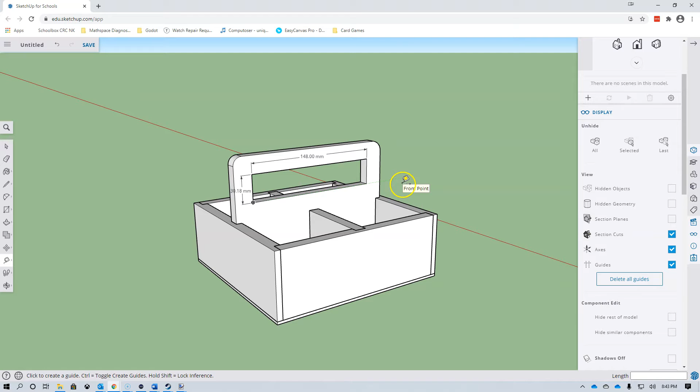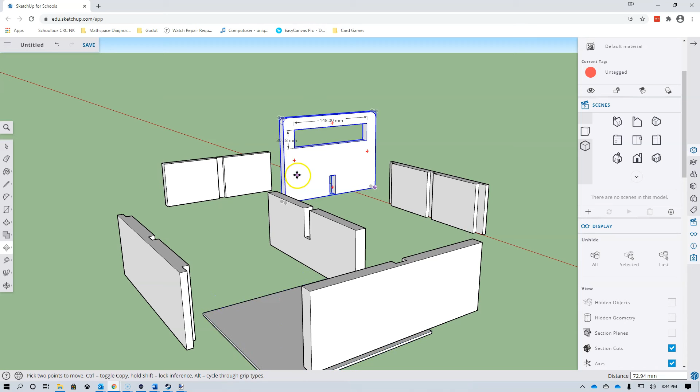And just like I did before, the great thing is now, in theory, you can take these pieces and explode them out, just by moving them out a bit. Take that one there. You can do things like hold down shift to lock it into a certain axis, like that. Maybe I should have locked that one in there. So you can break it apart so that you can see all the different pieces. You can rotate around and look at them. You can obviously then get into them individually and check all your measurements.

And then if you need to, you can always put them back together again, just like a bit of Lego basically. Just again, like we did before, taking advantage of the locking points to bring everything in piece by piece.

Alright, I'll leave you with that. Please go off and have a go for yourself. Start by just essentially copying what I've done to get the base model, but then certainly go ahead and start thinking about your design elements and how you're going to improve on this design overall.